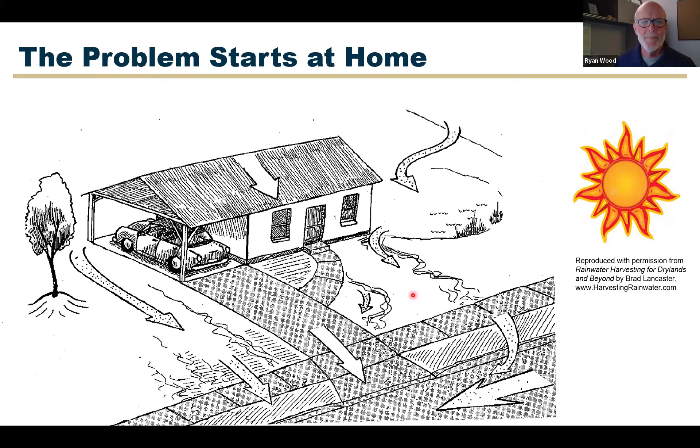And then we can be part of the solution. And I like that because we can make changes. And if we can make those changes just by harvesting our rainwater and everything that comes with it, which we'll learn through this lunch and learn, then that's important. And it's good to be part of the solution.

Okay, so reasons to harvest rain. These are just three, but capturing that stormwater definitely creates that on-site oasis. We can give our plants that extra water that we can capture from the roof, bring it down and nourish our plants. We're planting the water for the plants. To take advantage of that salt-free water, it's got a little bit of nitrogen charge to it.

And, gosh, the other morning, I looked at the rain gauge. We had almost 3/4 of an inch of rain at our house. And I'm looking at all the plants and the sun's coming up and they're a little bit more green and looking happy. But we can reduce that potable water usage. And that's key, because in water conservation, if we can maximize the benefit of our rainwater when it does rain, then we can reduce that potable water usage.

So for rainwater harvesting, especially for just the basics, a good start is always looking at Brad Lancaster. He's known as the rainwater harvesting guru down in Tucson, and he wrote a couple books. He's got a really nice website, packed full of resources. And this is the first book I would start with. So if this is your first journey into rainwater harvesting, I would highly encourage you to pick up this book. Check it out from the library.

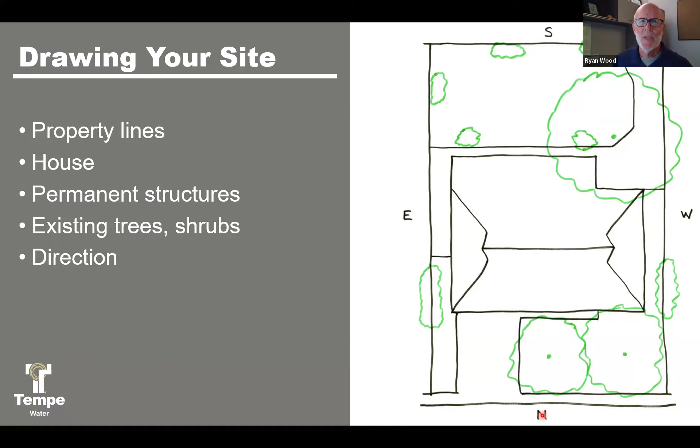So you're going to start with your base, and we're going to go with utilities. The reason why I start with utilities is this is that wild energy that flows through your yards. Well, really, it's not necessarily wild, but they can really deter a project, meaning where are those utilities? Where are they running through your property? Arizona 811 is a free resource. And it's by the law that before you dig, you will call 811 or go online and do a ticket. They're going to reach out to all the different utilities in your area, and those utilities are going to come out and mark where the utilities are located.

Now, electric, it's either going to be below ground or above ground. If it's above ground, we still need to look up. Yes, I may not hit it with my shovel when digging, but if I'm planting a plant, is it going to interfere with the above utilities? Same with your communication lines. The gas line, that's going to be buried. And the connection points of these services are right at the house. So the electric meter, the gas meter, the communication box, that's attached to our house somewhere. And those lines will be marked up to our house if they're underground.

The water line and the sewer line, however, the connection points are not necessarily right at the house. So your incoming potable water supply line, it's the water meter. The water meter is going to be by the street, sidewalk, typically. And so from the water meter to the house is a private utility, meaning you need to know where that's at. It's not going to get marked for you through 811. And same with the sewer line. The sewer line's that big line either in the alley or in the street, wherever the manhole is to access that.

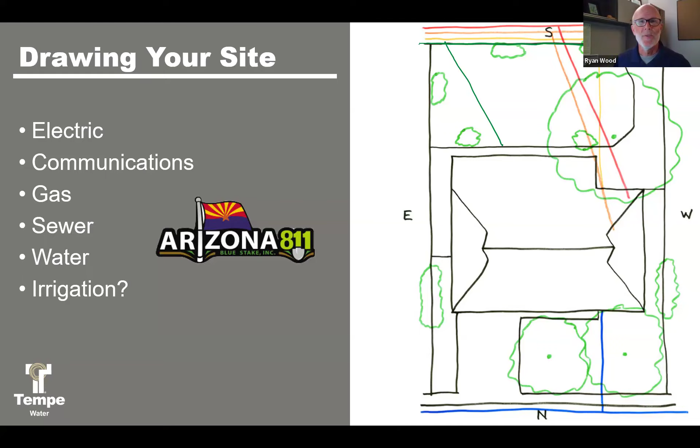So then we're going to get into sun. And whew, boy, it gets hot. I just came from outside, feeling a little steamy out there today.

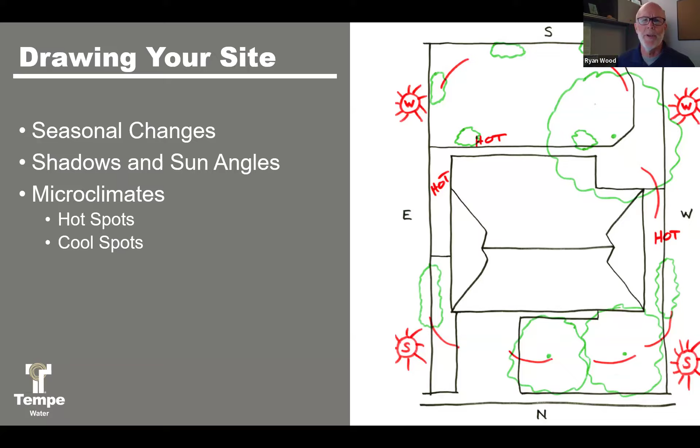So keep that in mind, because usually when I ask where does the sun rise and where does it set throughout the year, I typically will get east and west. And that is true, I truly hope the sun will rise 365 days out of the year, but it's not always east and west. And we need to be observing that. Why? Because it helps with our shadow patterns. This illustration is going to help demonstrate, especially on the south side of the home. For passive cooling, where's the shadow going to be cast? At what time of the day? At what time of the year?

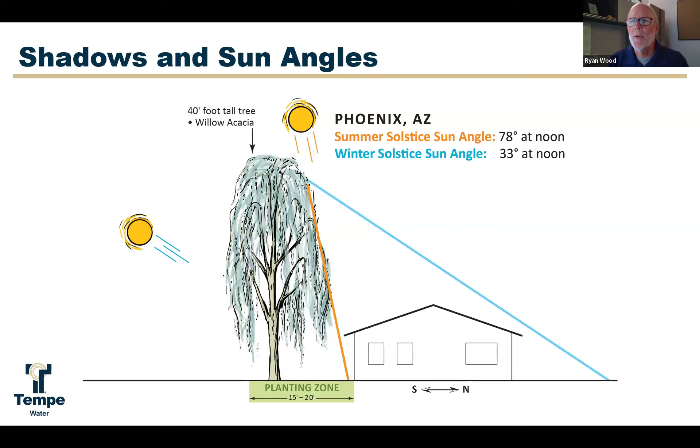If I'm planting on the west side and then the east and north, especially on this north side of the house, those could be trees that drop their leaves or not. They could be deciduous trees or non-deciduous, especially as we come down on the side here of the house.

Now for shadows and sun angles, this is where we're really thinking about that passive cooling. What can we do to help cool our home without using different types of structures, just using living plants to help cool our home? Now that works really well if we have enough space on the west side of our house, because we can see here on the west side, that's the warmest side.

So trees, shrubs, things that will be right tree, right place, because if we have a neighbor right here, a big tree may not be appropriate. Or if we have those narrow, tiny spaces, trees are not going to be appropriate because of their crown, their canopy size. We want to make sure that we're not causing a lot of extra maintenance work.

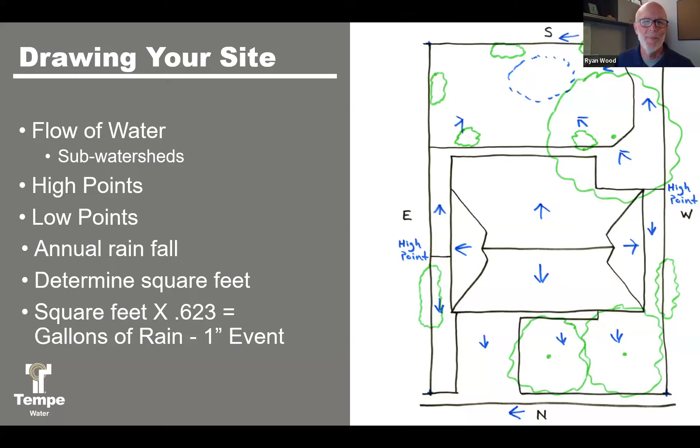Principle number 3, start small and simple. Wow, I remember my first water harvesting projects. Actually, I remember my first water level, which we'll see here a little bit later. I had to over-engineer it, of course. So starting small and simple, I'm always trying to echo back in my mind, like, okay, let's not over-engineer it. Let's just start small. Let's start simple. Let's think about what we want to add.

And so, we talked a little bit about passive cooling, and water conservation definitely should be in the back of our mind, always using our water the most efficiently and effectively. Low maintenance, areas where we can go out and enjoy and have a retreat. Do we want to eat from our plants? So all these different things we can think about within our rainwater harvesting project by starting small and simple.

Number 4, we get into spread and infiltrate the flow of water. So this is where the fun starts. Okay, so we've gone through our long, thoughtful observations. We've noted down where's our pathways, where's our prevailing wind, where's all these factors, also known as sectors, flowing through our property. And now we're ready to start thinking about how to slow that water down and get it to sink in the soil by using earthworks.

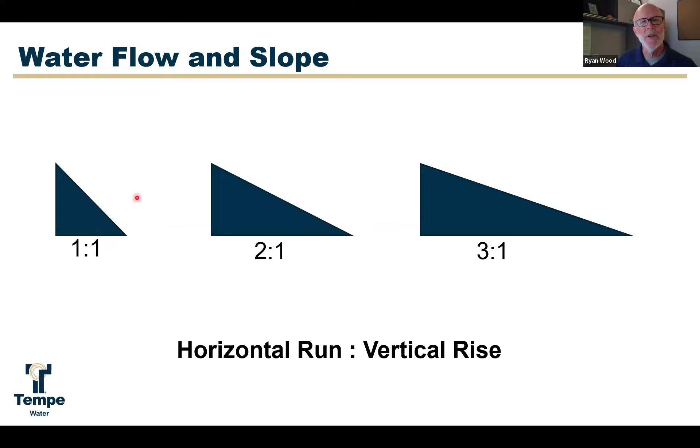So a swale, as I mentioned, is for conveying water. We had our berm and basins; now we've got our swales for conveying water. In terminology, this gets a little tricky, because in some documentation a swale reads as a basin. And that's what I really like about Brad Lancaster in his book: he made that separation.

So whenever he talks about a swale, it's conveying water, not a speedway from one point to the other, but a slow, passive way of getting that water from one feature to the other. Remember, we just want that water to slow down as we're moving it, with a chance to spread out and sink. A swale is used for conveying.

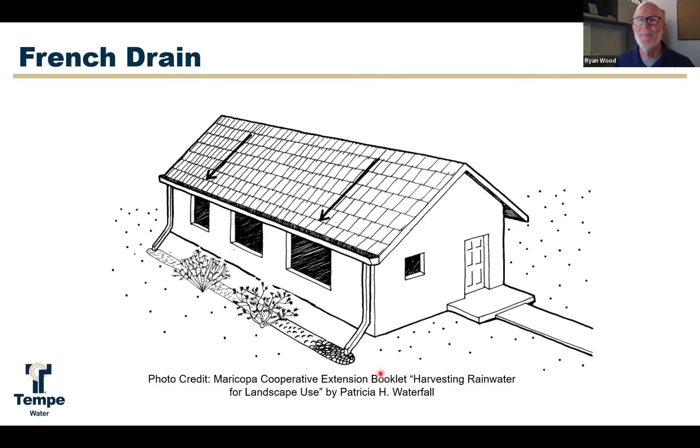And then plants. We got to plant the pump. And so when we create these features, so we've created our berms and basins, our swales, our basins, French drains, we're planting the water, but we're planting the water for plants. Because if we're just putting the water out into a basin that doesn't have many trees or shrubs, ground covers, no roots to soak that moisture up, what we might end up is creating a problem, and we don't want that. Because in all these features, we want that water to drain in less than 36 hours.

So we want to make sure, as I mentioned, we're compacting our berms, but we are not compacting our basins. And then we're planting roots so that way it helps break up that soil. It helps with our soil life, which is also going to make our soil a little bit more permeable.

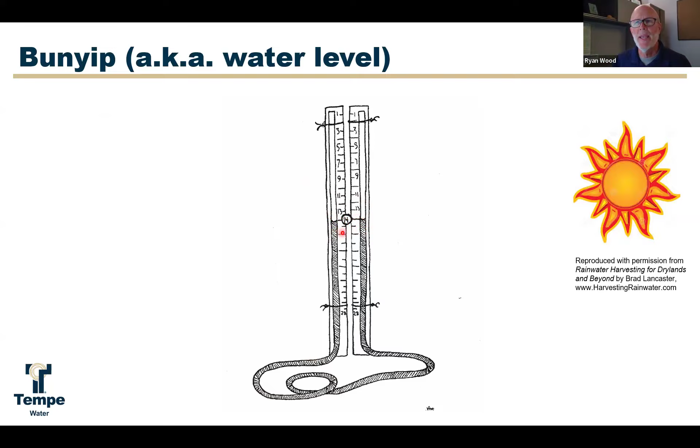Perfectly smooth as glass. That water is at the same level all the way around the lake bed. Okay. Well, same in your bunyip. When I'm bringing them together, and that's how we calibrate it, I bring it together and yep, we're at the same line. There's no kinks or no bubbles in my hose. And then I go out to measure.

So one person's going to hold one end, the other person's going to hold the other end, and we're going to read the difference between the markings. Okay, so here by the home, we read a 14. Here up on top of the mound, we read a 16. So the difference is 2 inches. Now we could leapfrog, we can keep moving around. We just got to keep track of our positives and our negatives. So that way we can run a tally at the end.

But knowing where the water flows and have a planned overflow. So in that ideal scenario, you'll have a minimum of 4 inches of what you don't want to flood out before the overflow. Then you're going to have the berm and an overflow, another drop of say 4 inches. Okay. So you want to make sure your elevations are all key. So that way, when the storms come and they fill up, and they can fill up, you're not causing flooding in an area that you did not intend. So know your levels, know where your overflow is.

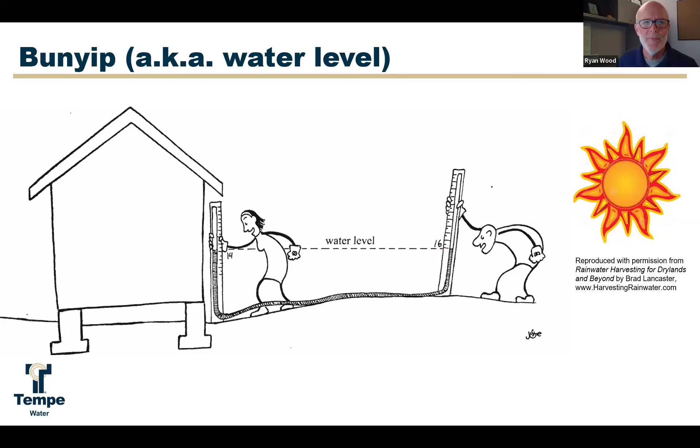And that's important because when I'm talking wood chip mulch, I am not talking bark, especially pine bark. Bark is very light, it will float, and it's waxy. So I'm looking at all the other wood that's been chipped and shredded, the stems and leaves. I'm looking for a really good texture because that will kind of lock in place and it won't want to float away on you.

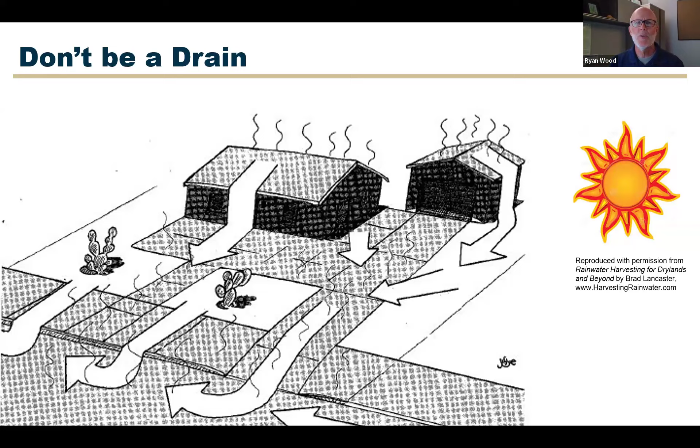But the best time to go out and watch where the rain patterns are is while it's raining or shortly after. Start observing where water's settling, where those low spots are, so those are key things to observe after a storm. And then get to work. Go out, start implementing these, start small and simple, and be part of the solution.

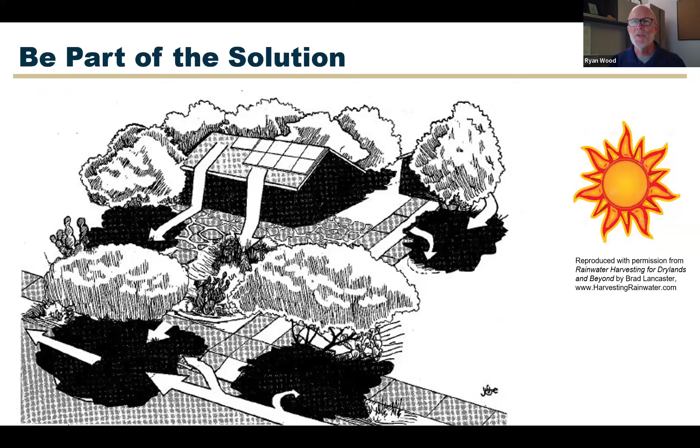All right. So that was the rainwater harvesting presentation as a representative of the City of Tempe for water conservation. For all of the Tempe residents out there, the closest that we get to a rainwater rebate is our grass removal and conversion rebate. It's up to 50 cents a square foot for removing grass and replacing with, yes, plants.

I like to say it's replacing with shade because we're going to require a 30% area of plant coverage at full size. So when you plant that little 5-gallon sapling of a desert willow, it's going to be 25 feet in diameter. And that's the size that we'll be taking into consideration for that plant coverage. And then we offer a rebate, up to $75 a year, to plant the shade.